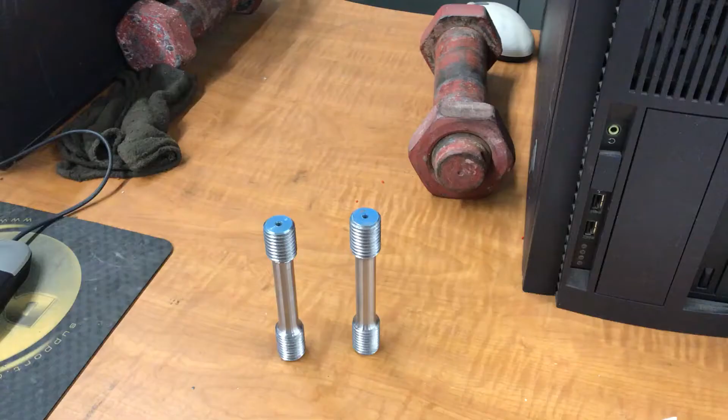Okay, so I'm going to test two steel coupons, a hot rolled and a cold rolled. This is the hot rolled specimen. It's painted blue on one side and black on the other side. That's how I know that it's hot rolled, is the black paint on one side.

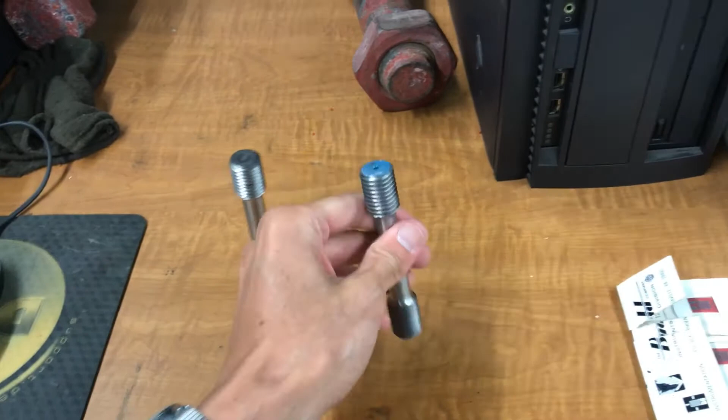This is the cold rolled specimen. It's painted blue on one end and gray or maybe white on the other end. That's how I know it's cold rolled, is that it's painted gray on one side. So both specimens are blue on one side, but the black paint indicates hot rolled, and the gray or white paint indicates cold rolled.

Hot rolled steel, one application is the steel rails in railroad tracks. Cold rolled steel, one application is the steel used to make appliances. So these are the two specimens I'm going to test this morning.

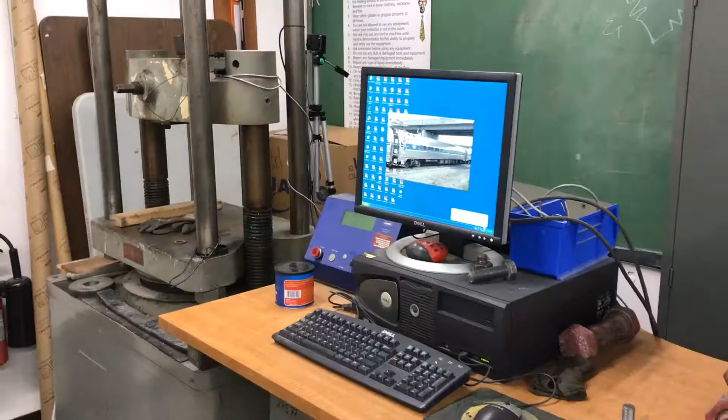Okay, so here's the machine, the universal testing machine. I'm stepping back so you can see the whole thing. Okay, so here is the computer. I'll be using MTestW software.

Let me see if I can find it here. Right here, I'll shortcut to MTestW. That's the software that I'll be using.

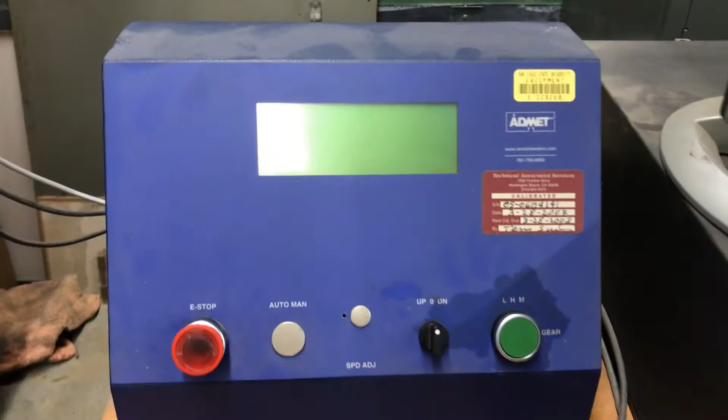So this is the controller. This doesn't belong here. This blue box is the controller. It controls the piston, the hydraulic piston.

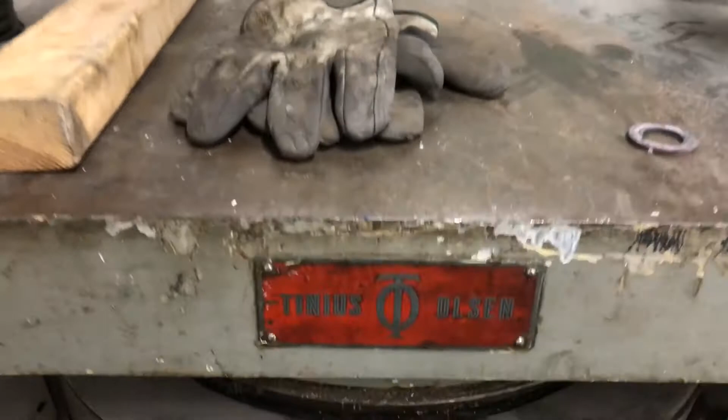What do I need a hydraulic piston for? There's a hydraulic piston under here. This is the loading deck. Tinius Olsen, this machine was manufactured by Tinius Olsen. This is the loading deck.

This is the crosshead, this is the top of the frame. So I'll step back, allowing you to see everything. The loading deck on the bottom, the crosshead in the middle, the top of the frame on top.

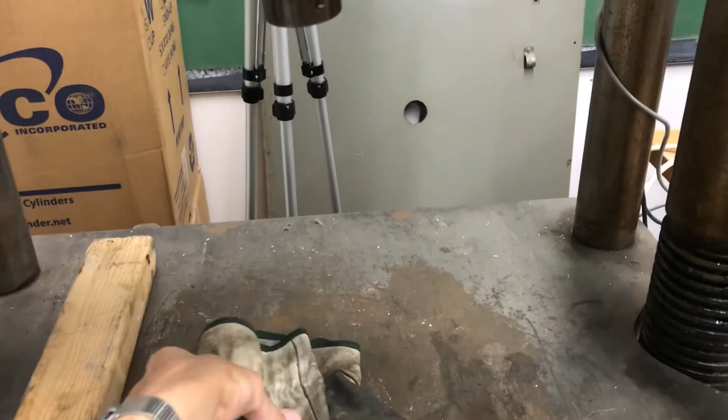If I wanted to test something in compression, I'd put it here on the loading deck. So compression testing down here. If I want to test something in tension, I'd put it up here. So I'm going to test the steel coupons in tension, meaning I'm going to put the coupon up here.

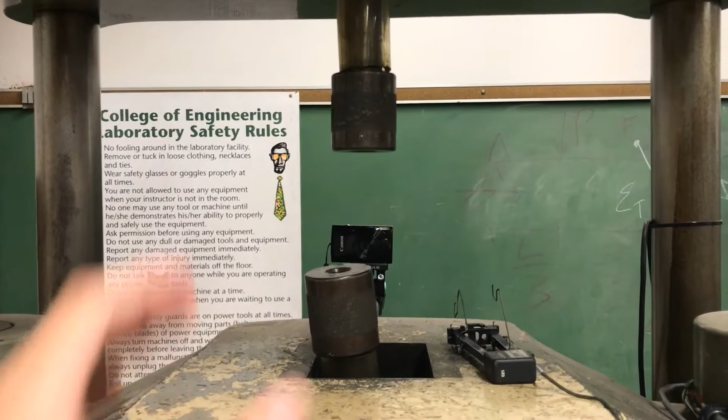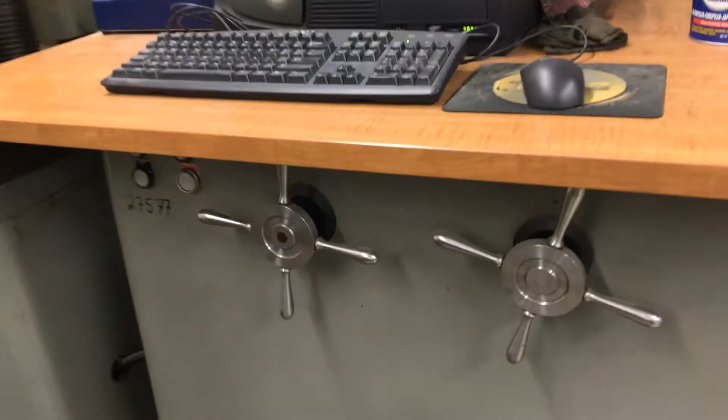So this machine is hydraulically operated, meaning it uses hydraulic pressure to exert force on the specimen. These wheels down here, they look like steering wheels. Those are no longer functional, but they used to control the loading and unloading of the specimen. Now they don't do anything anymore because the machine has been retrofitted to be computer controlled. So the wheels you see down there are no longer functional.

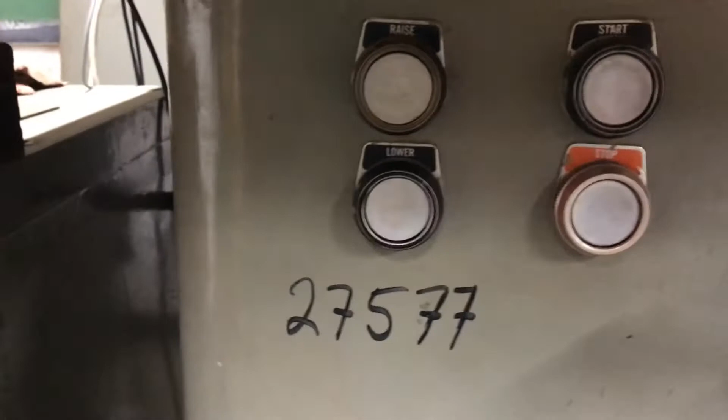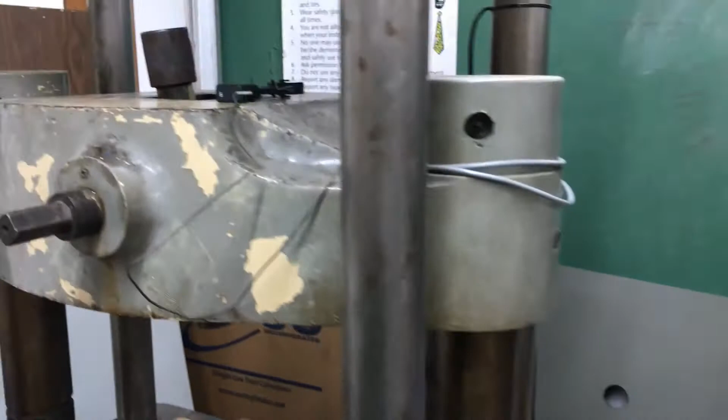Some of this stuff still works. We don't use the start or stop buttons anymore, the computer takes the place of that. The raise and lower controls the crosshead. The crosshead has an electric motor that allows it to be moved up and down, but we only move it up and down when we're loading the specimen. Once the test starts, we don't want to be moving the crosshead.

So there you have it. During the test, the crosshead remains stationary, but it's actually the loading deck that's moving up. So there's a piston underneath here that pushes the loading deck up. It also pushes the top of the frame upward.

The crosshead remains stationary during the test, so the specimen, which will be in here, is actually being pulled from the top. Let me step back so you can see this in context. The loading deck on the bottom and the top of the frame up there both move up during the test. The crosshead remains stationary.

Okay, over here on the right side, the on-off lever that controls the electric motor. Okay, so let me turn this on, take the padlock off. The sound of electricity, the padlock up here. Okay, so I turned that on.

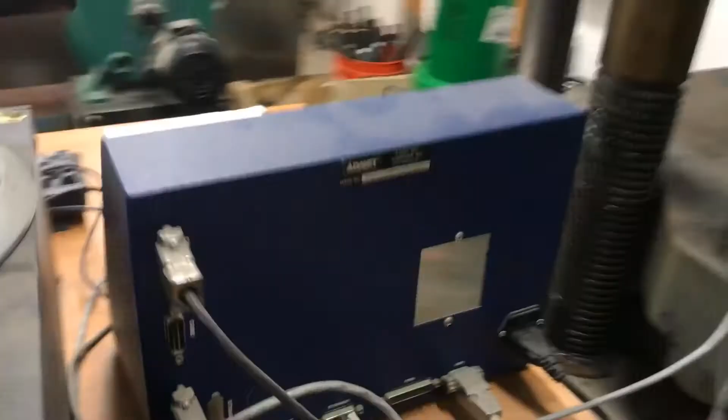And now I'm going to turn on the controller, so there's a switch on the back side. Switch back here, turn it on. Okay, waiting for Windows, it says. Okay, so now I'm going to fire up the program, MTestW, right here. Okay, and here's the screen that I see.

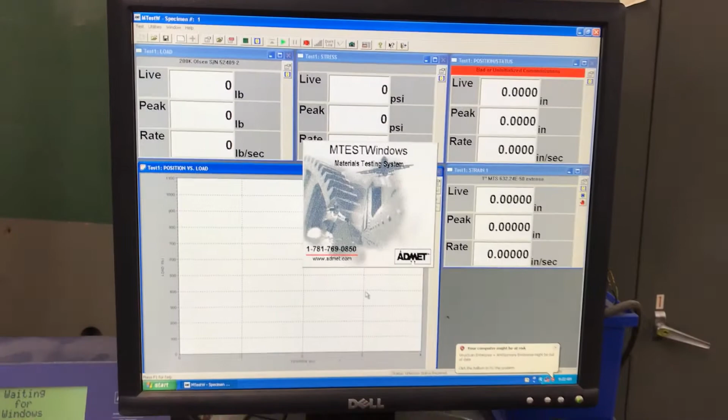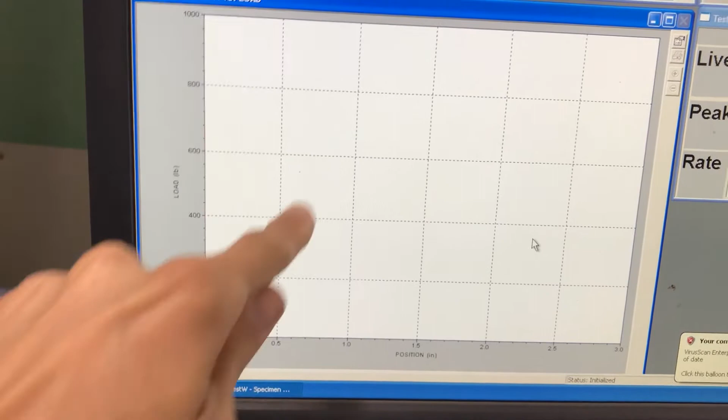So during this test, it will trace out a load versus position graph. Load versus position, so not really stress strain, but load versus position. It's actually a load versus position of the machine, that is the crosshead, the grips, the frame. And so that's what we'll be looking at during the course of the test.

I'll be using an extensometer to measure the elongation of the specimen. This is the extensometer, MTS.

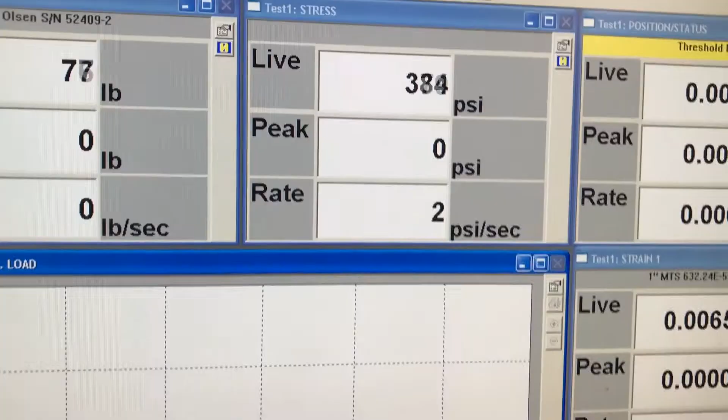Open up the test setup. So let me find that icon. This one right here, can you see it? Right there, what does that say? Use test setup.

Okay, so the first thing I have to do is float the table. So to float the table, I have to click on this, go to 0.5 inch. That floats the table, meaning it's going to move the loading deck up a half inch, just to introduce some hydraulic fluid into the system. So that's the first thing I have to do, float the table by going to this selection right here, go to 0.5 inch.

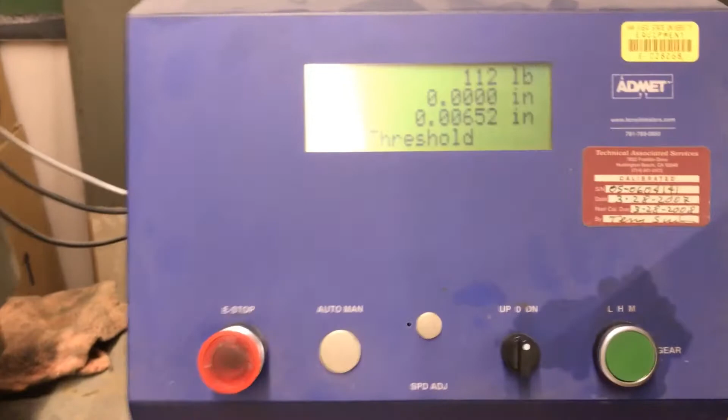But nothing's going to happen until I start the pump. So to turn on the pump, I press the green button here. Okay. Should be moving up now. See it moving up.

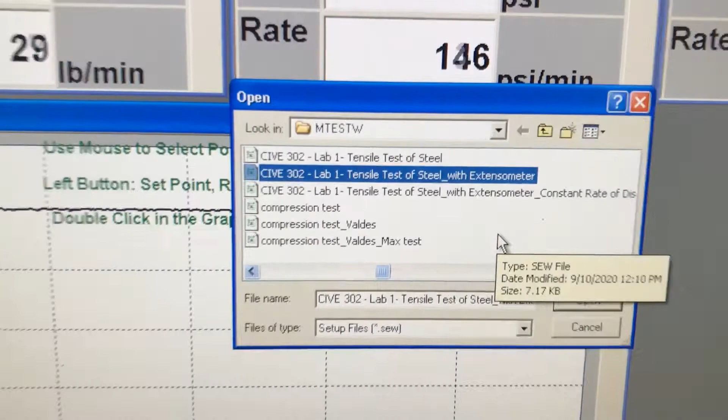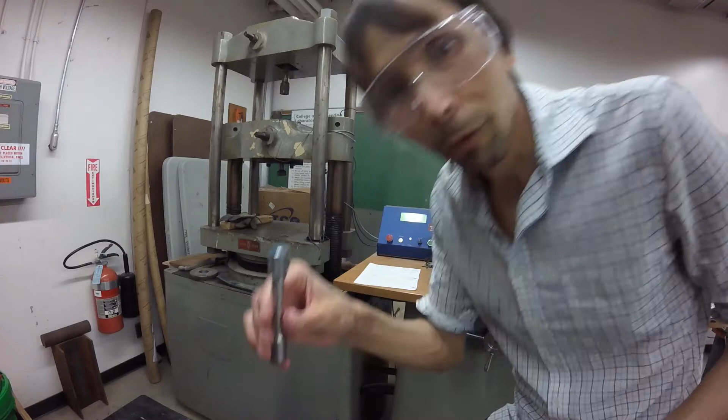Once the table has been floated, then I choose this, CIVE 302 Lab 1 Tensile Test of Steel with Extensometer. So the hot rolled first. First I'll do the hot rolled.

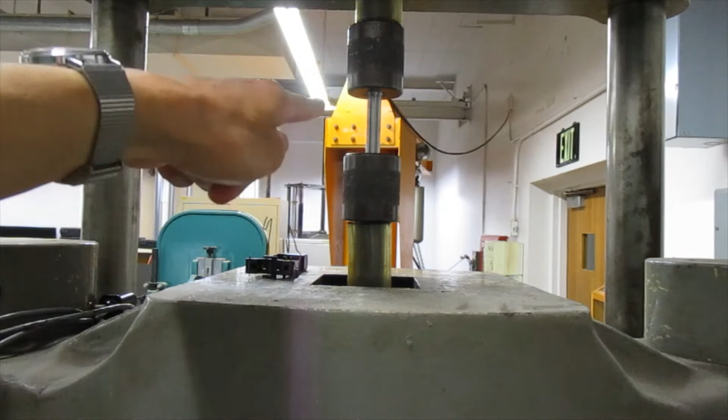We filming back here? Okay, I just put the specimen in. Now I'm going to put the extensometer on there.

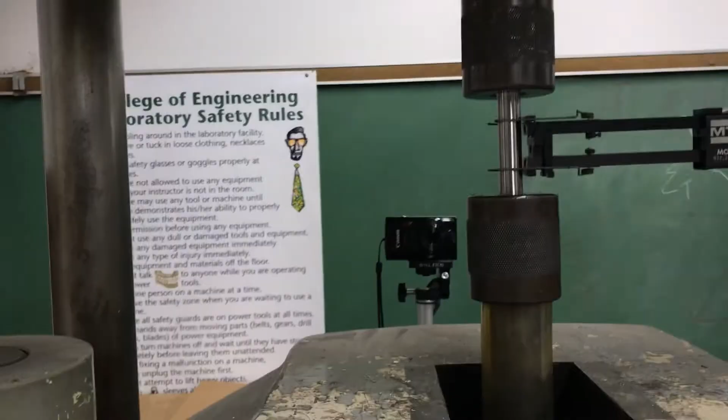Okay, so I put everything in place. Extensometer is on there, specimen in place. Can I start this? So to get this test going, I have to zero it out with this icon, and then press play.

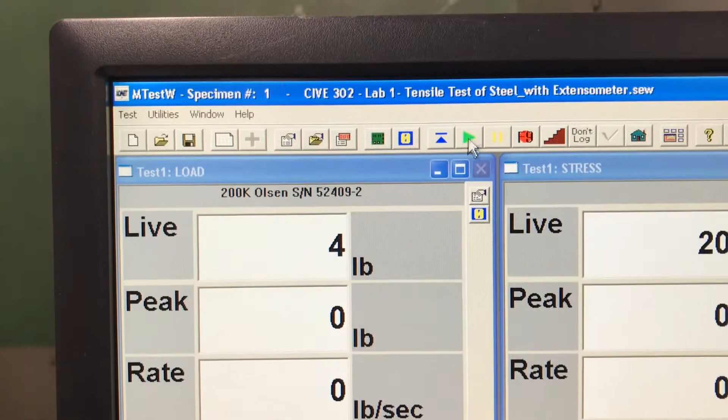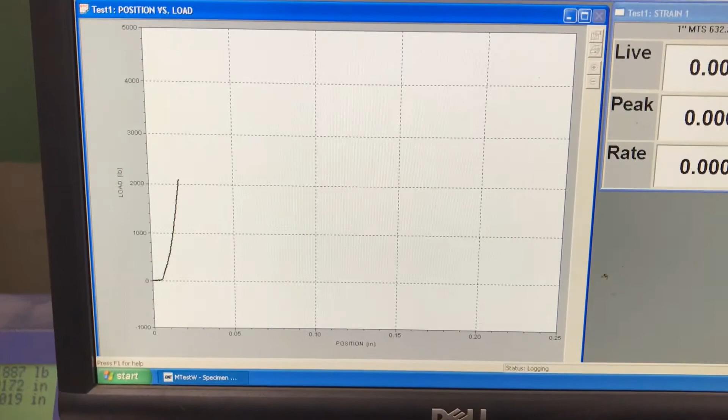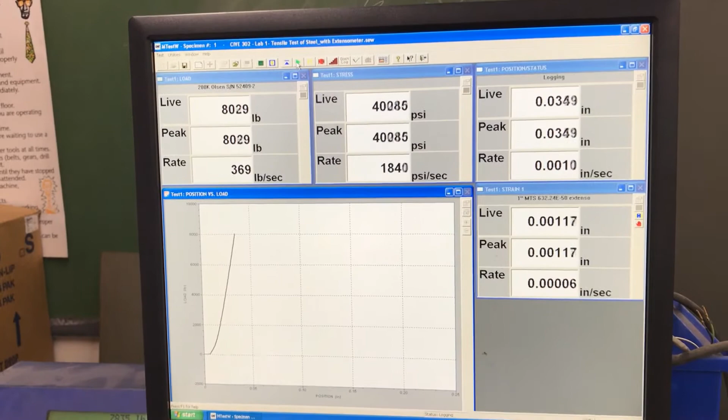You see the diagram being traced out here, load versus position. Well, it looks like I have a little slack there in the specimen. I should have taken that out. It's okay, I'll do it for the next one.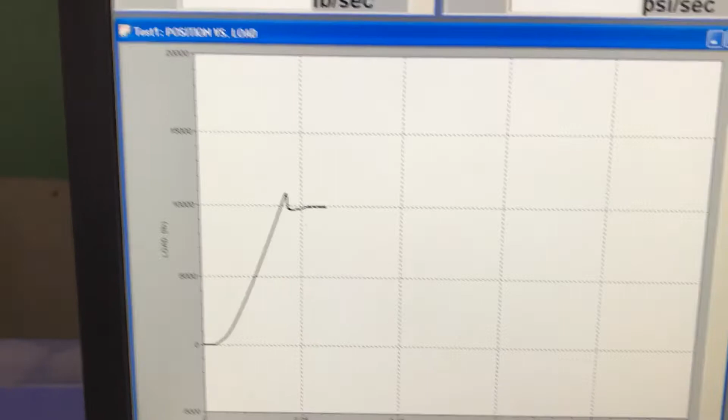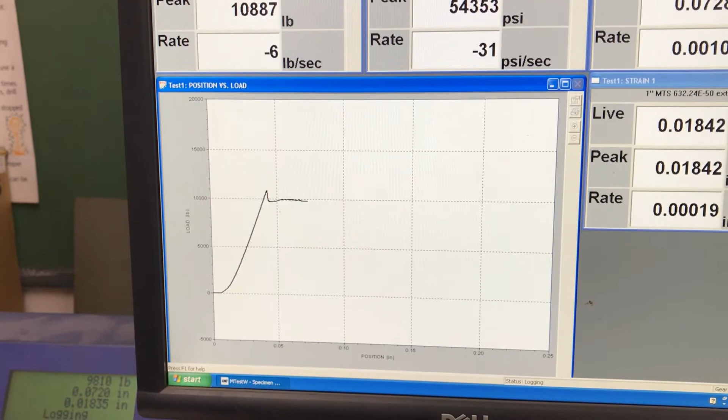Okay, so this is hot rolled, so you see the little yield plateau being traced out there. When I do the cold rolled, I'll remember to take out that slack. After it peaks, I'm going to take off the extensometer. Here's the specimen, no noticeable change yet.

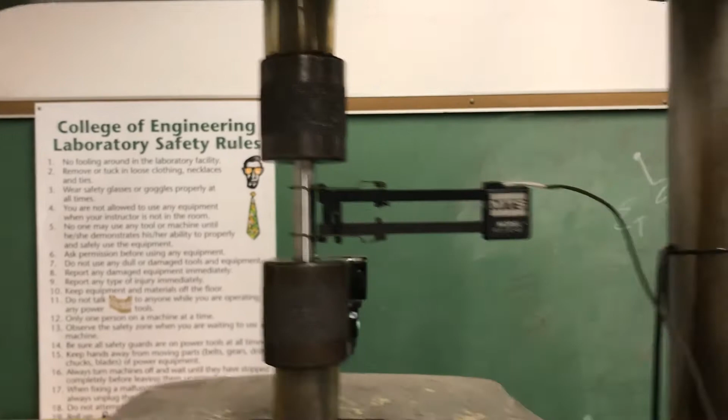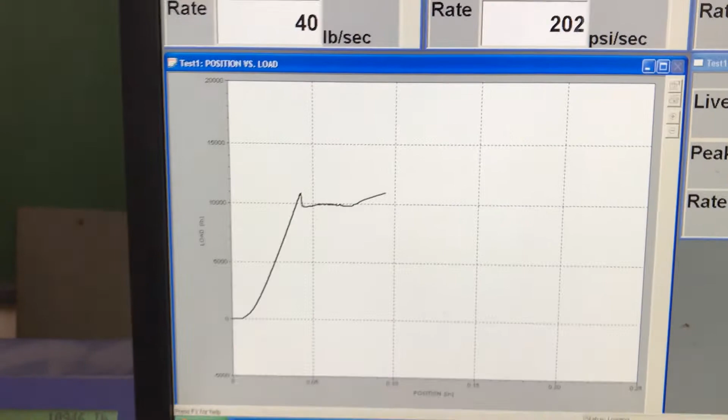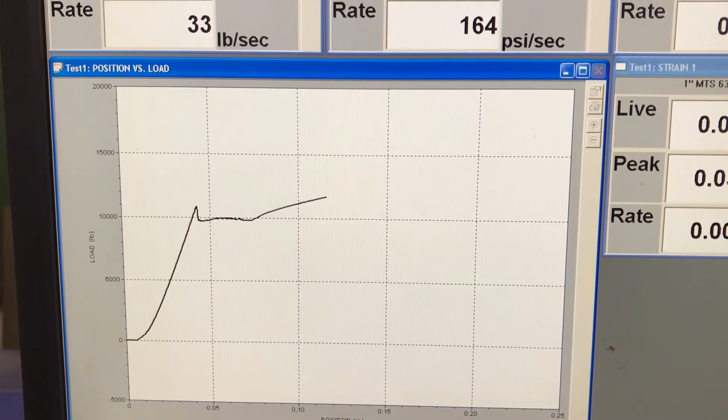What is the load up to? Reached a maximum yet? No.

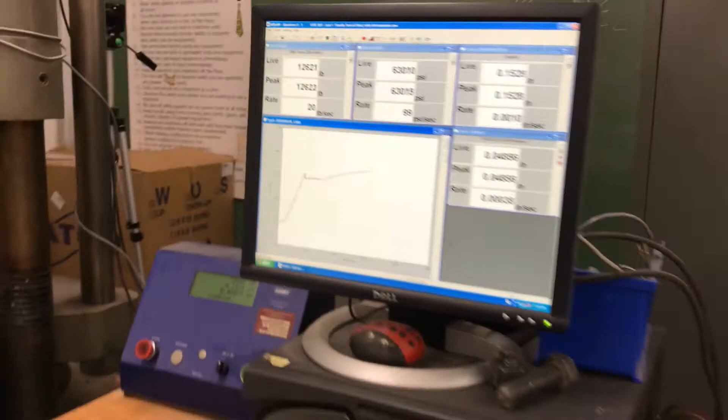Here's the entire setup. Maximum yet? Still climbing. Looks like we're up to about 13,000 pounds.

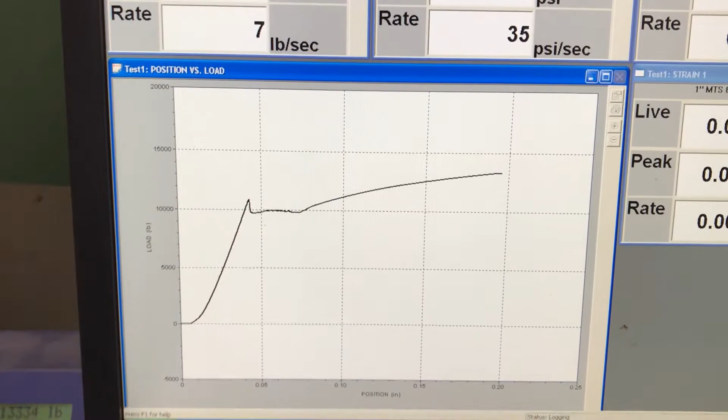How do I know it's the hot roll? Because of that plateau. I meant to say that I know it's hot rolled because the specimen was painted black on one end. But I also know because I've got the yield plateau here, which took place at 10,000 pounds.

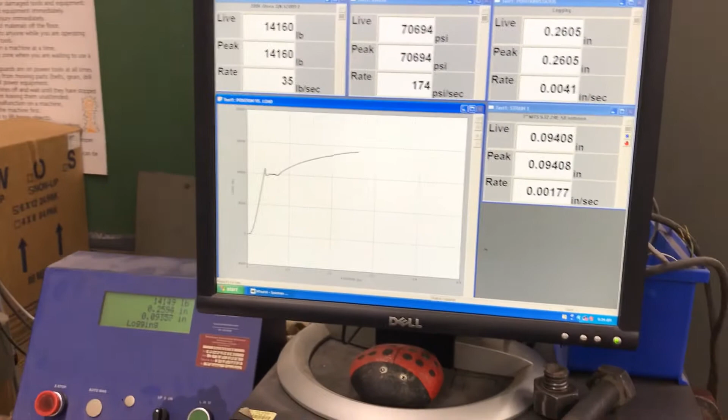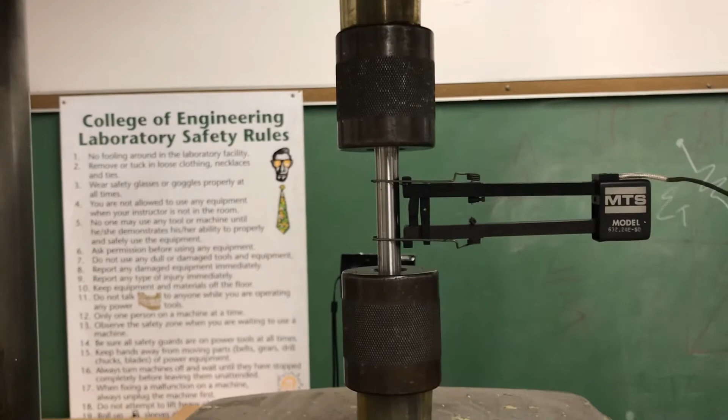See how it zooms out? So nothing really interesting with the specimen yet, I don't think. It might have gotten a little bit longer, but it might not be noticeable with the naked eye.

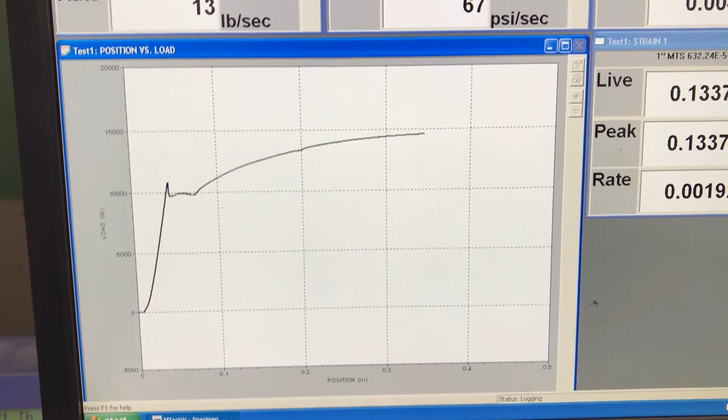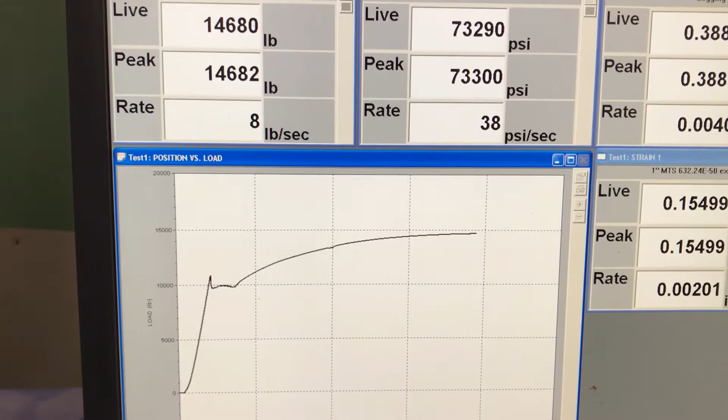Now once this reaches its peak, then I'm going to pause it and remove the extensometer. Tell me when this starts going down, because when it starts going down, that means it's time to remove the extensometer.

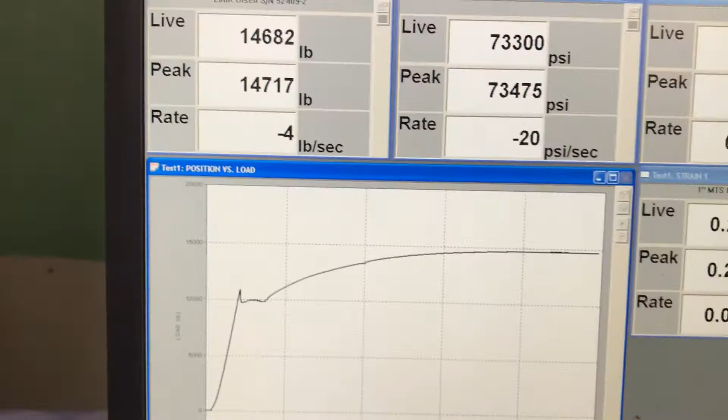I think it's peaked, hasn't it? So I'll let it go a little bit farther. How do I pause it? This button right here. So I think I'm going to do that now. Pause.

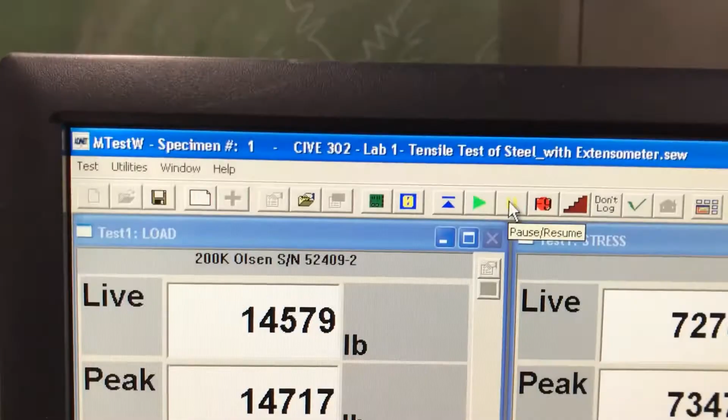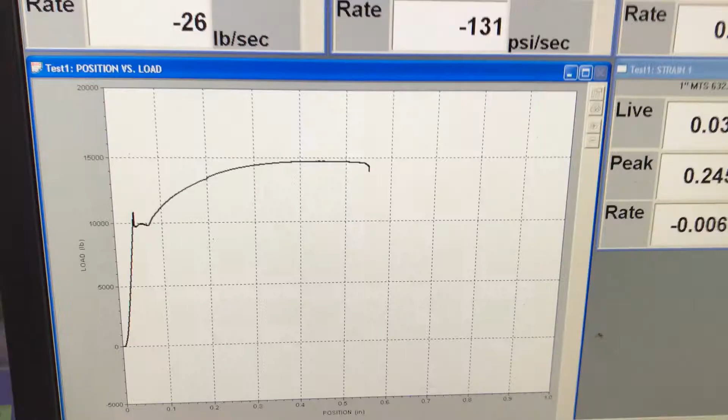So I'm going to take off the extensometer. You see the load bleeding off a little bit there when I pause it? Okay, let's resume.

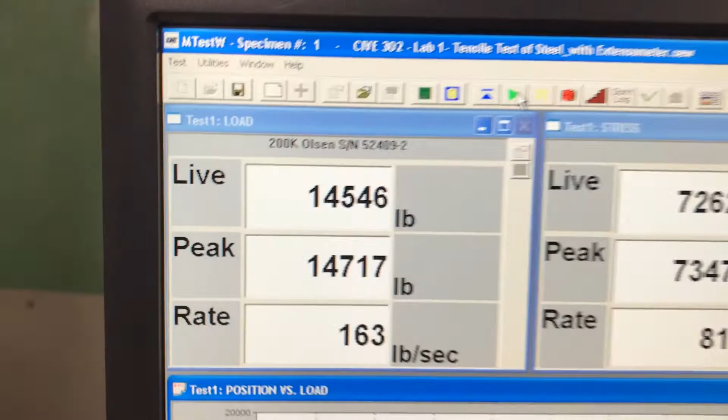Okay, so now we're resuming. And what's going on here? Alrighty then.

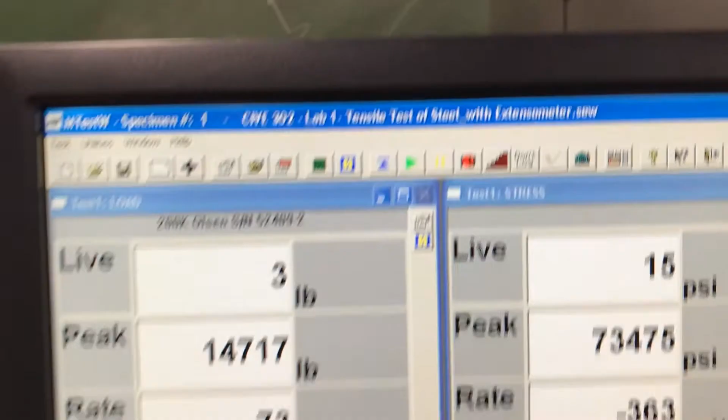So once it breaks, I click on F9 to stop it. You see F9? That means stop the test. So it just broke. It just broke. I'm picking it up on the other side with that other camera. So now I'm going to remove it.

Are we still filming back here? I'm going to stop this.

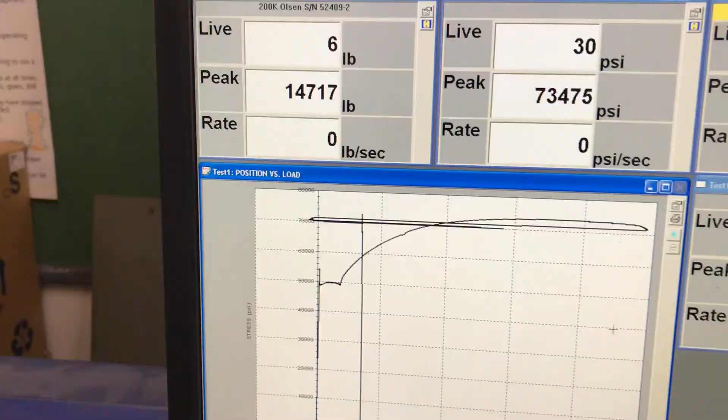Okay, so now I'm going to save it. Okay, I just saved it. Now new test. So up here, test, and then new. Okay, new test.

Okay, now the cold roll. So I'm going to put in the cold roll.

Actually, you know what I'm going to do? I'm going to float the table again. Actually, I don't need to float the table. I think it's good.

I took out the slack this time. I put the extensometer on here. Okay, extensometer in place. I took out the slack by pressing the lower button a few times very quickly. That takes out the slack, so I won't have that issue this time.

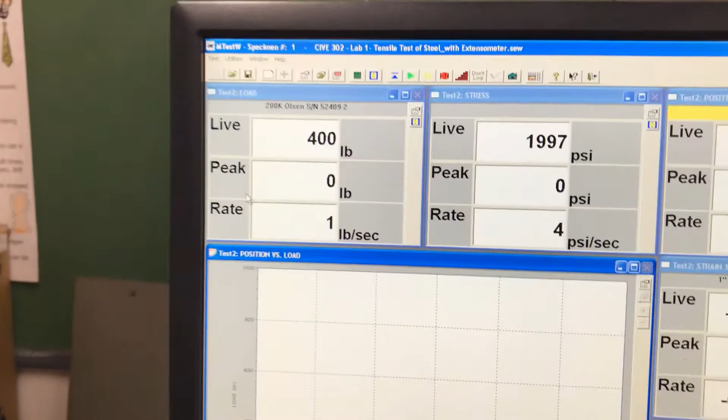Okay, so can we get this started? So zero it out and press play, and there it goes.

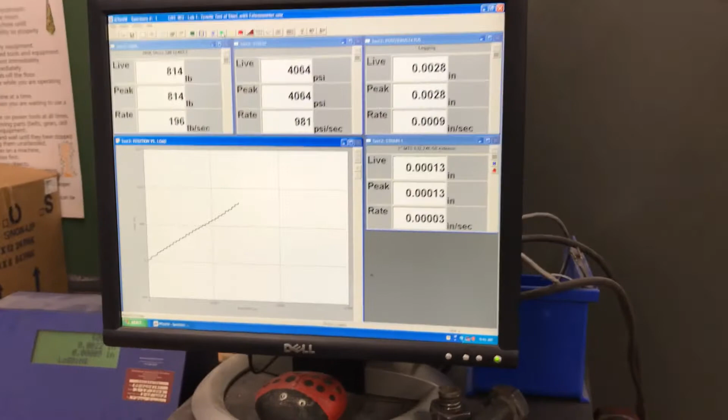Filming over here. Back to the main screen. Okay, so here is the specimen with the extensometer on there, and another camera in the back, as you can see.

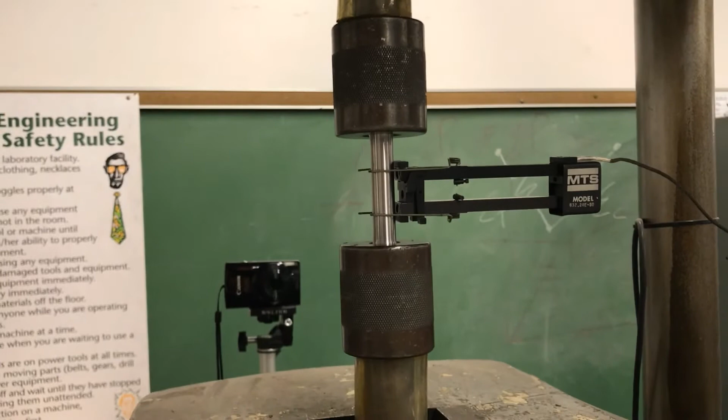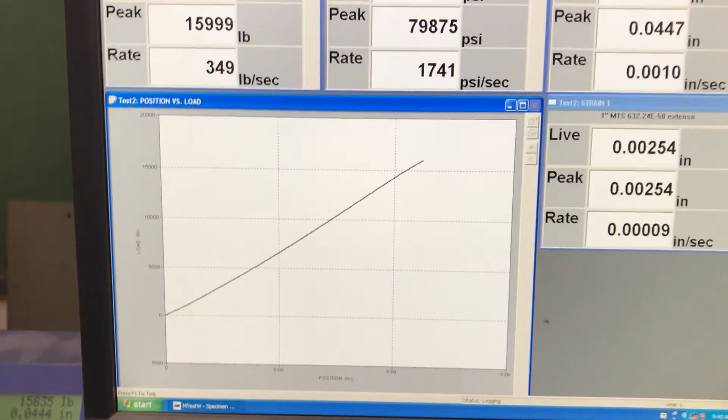So this time I took out the slack, you see? It just starts there at the 0, 0 position. I don't see the hardening plateau. Why not? Because this is cold rolled.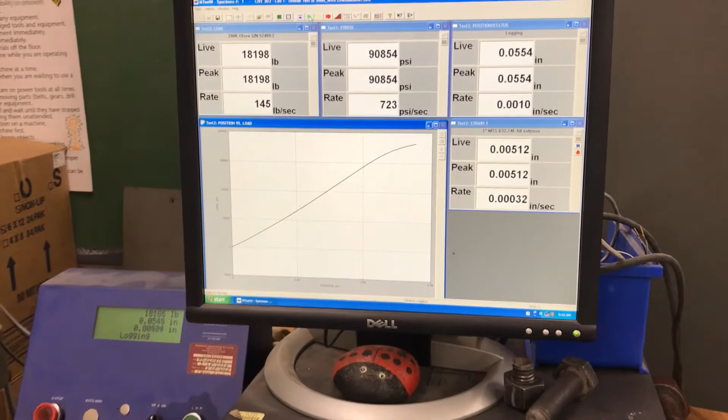Seems to be kind of sort of leveling out there. So this is the linear elastic portion. So now it looks as though we've done some plastic deformation to this. We have left the linear elastic portion.

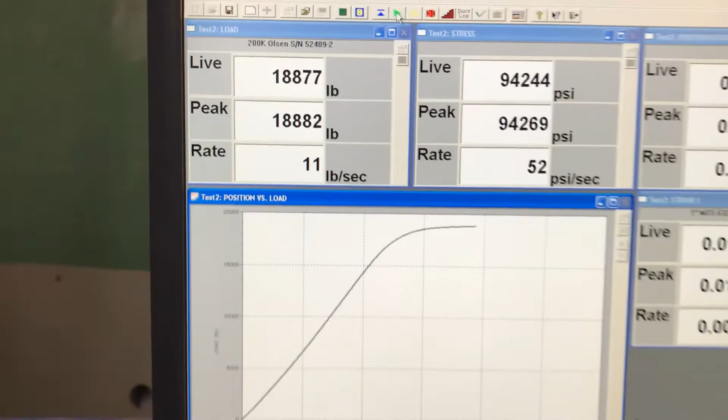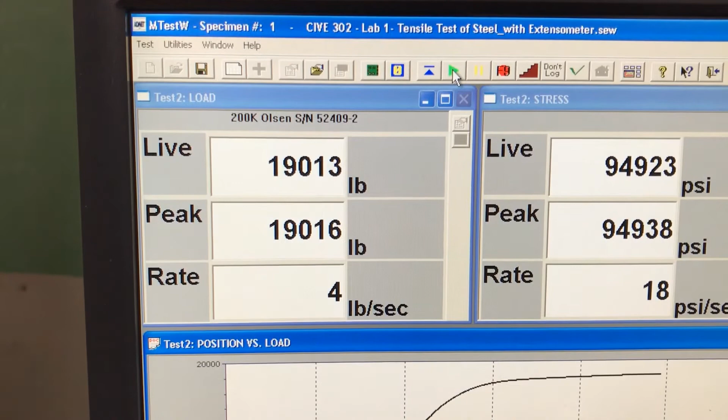And once again, I want to pause this and take off the extensometer before it breaks. Now why do I do that? Because when it breaks, I don't want the extensometer falling on the floor. It's an expensive piece of equipment, so I don't want it hitting the frame on the way down, hitting the floor. So that's why I pause it.

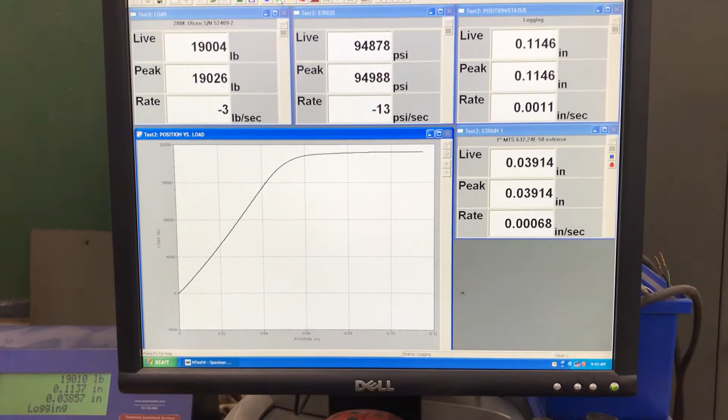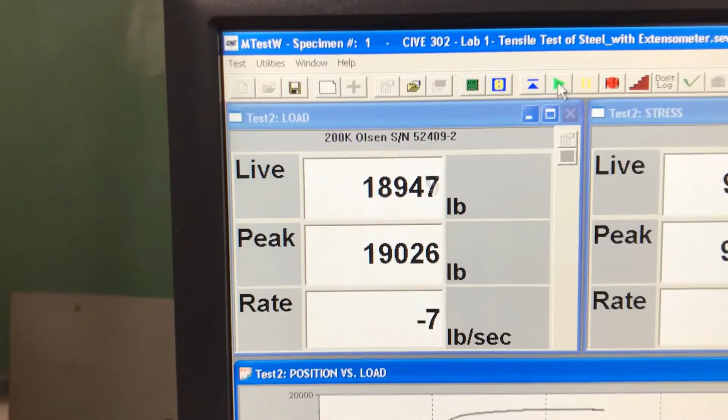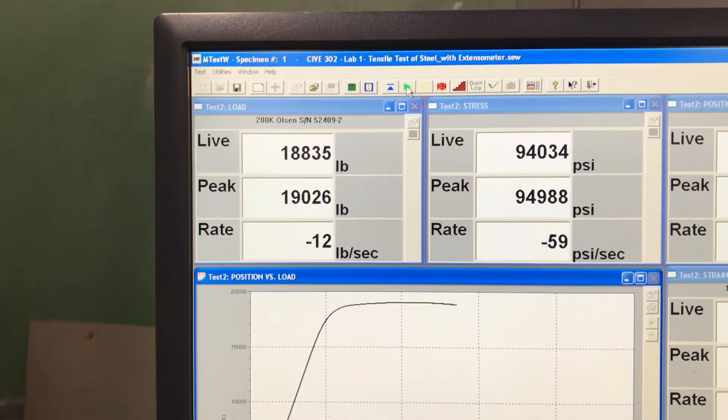I pause it after we reach a maximum. So let me know when it peaks and starts dropping, because I want to take off that extensometer. It looks like it already has. Okay, so it has peaked already.

Well, so I'm going to pause it. Pause. Take off the extensometer.

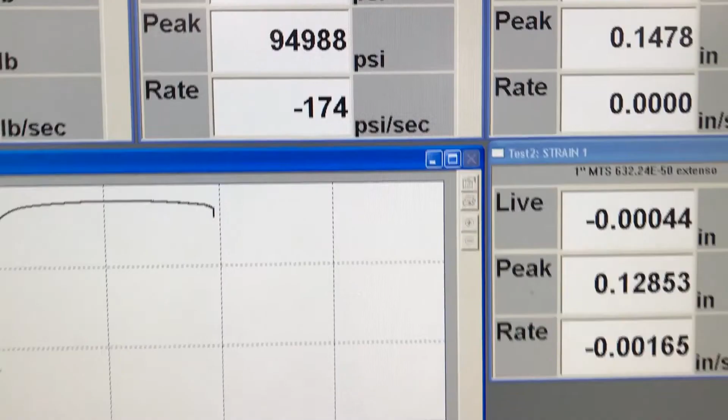Bleeds off a little bit. Now resume, can you see this? Resume. Okay, so now I'm going to step back and wait until it breaks.

Okay, let me step back here. Do you see it necking? Is it necking yet? A little bit.

Graph looks weird there. F9. Save it.

I'm going to shut this camera off. Okay, so when I close the program, the hydraulic pump turns off, so that's why you don't hear the sound anymore. I'm going to turn off the controller. The switch is around the back side, right here. I don't like to hear that buzzing sound of the electricity, so I'm going to turn off the electricity over here. Like that. So there it is.

The hot rolled and the cold rolled specimens.

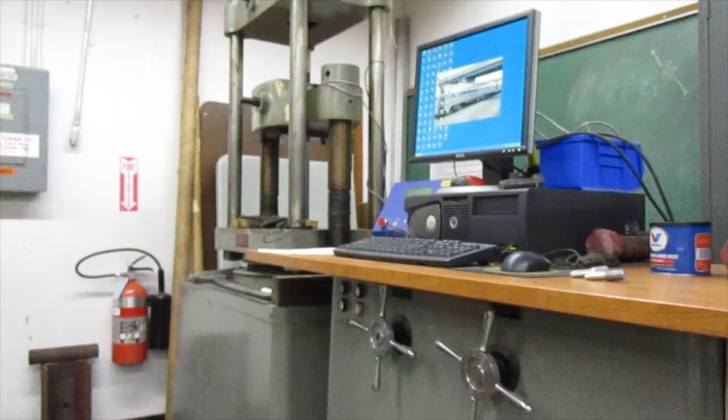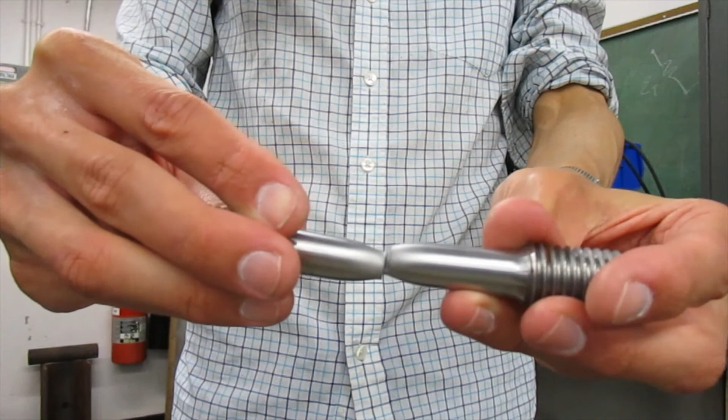Okay, so it's Saturday morning, Saturday, January 16th, 9:44 a.m. I just completed the tensile test of steel. So which is this? Is this the hot rolled or the cold rolled? So I broke the specimen. Do you think super glue would put these back together again adequately?

So there you have it. That's the cold rolled specimen. The hot rolled specimen. Here's the hot rolled specimen. All right, so there you have it, the tensile test of steel.